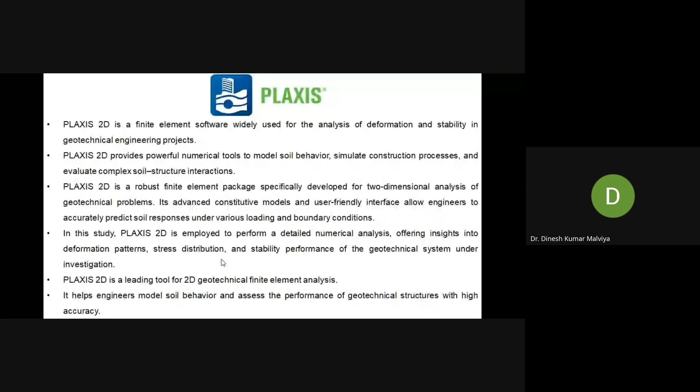With this small background of the software, today's topic will focus on some learning outcomes, in which we will try to understand the fundamentals of shallow foundation behavior under fluctuating groundwater conditions, then learn how to set up the model of shallow foundation in the 2D version of Plaxis using realistic soil constitutive models, and explore the influence of soil-raft stiffness used to represent the flexibility of the soil in terms of flexible and rigid foundation.

Also, the very important factor of groundwater fluctuation will be assessed, because with variation of groundwater, pore water pressure develops, and consequently effective stress changes, since total stress equals effective stress plus pore water pressure. So if groundwater fluctuation is there, pore water pressure fluctuation will be there, effective stress fluctuation will be there, and consequently it affects the shear strength of the particular media.

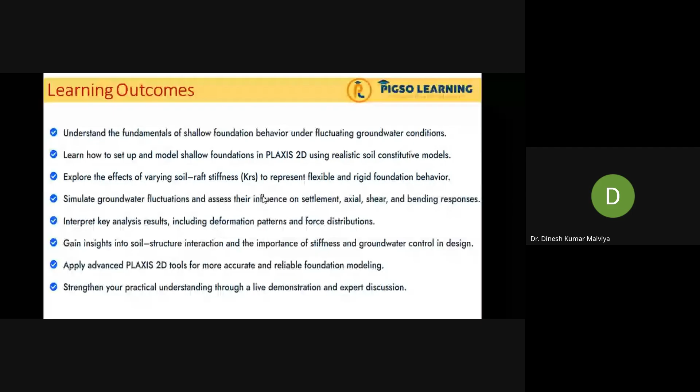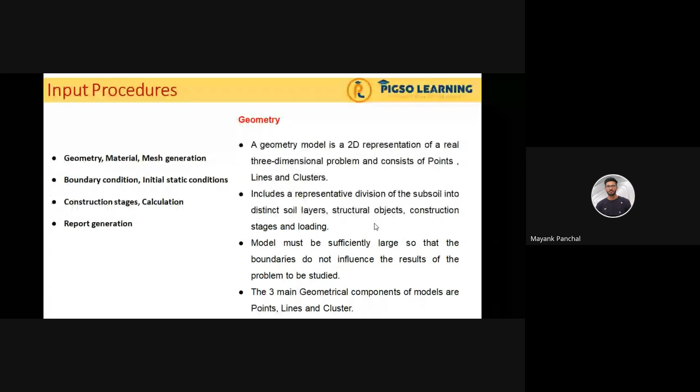We'll discuss some of the input parameters and procedures, which will include geometry, material, mesh generation, boundary conditions, initial static conditions, construction stages, calculation, as well as some report generation.

When we talk about geometry, we'll discuss representation of soil models, soil stratigraphy, and material properties related to structural elements such as pile foundation, or in our present case, raft foundation.

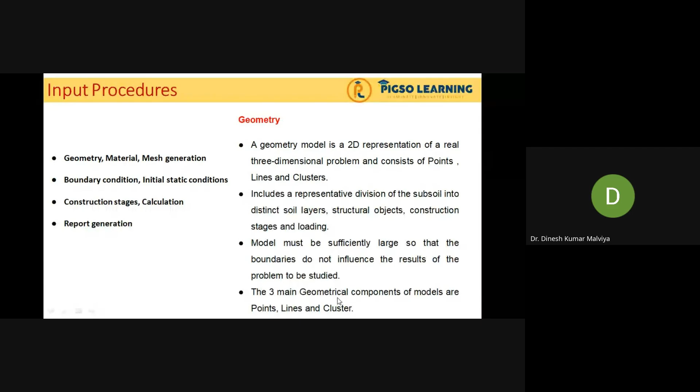This will include distinct soil layers, structural objects, construction stages, and loading. The model must be sufficiently large so that boundaries do not influence results. Boundary condition is also one of the important parameters to be taken into account, and the main geotechnical geometric components are point, line, and cluster.

When we talk about boundary conditions, the deformation problems are of two types: conditions consisting of prescribed displacement or prescribed force based. All boundaries must have one boundary condition in each direction so that it satisfies all conditions. So prescribed forces are equal to 0, and it is a free displacement.

Some fixity depends upon the fixed foundation, or maybe vertical or lateral direction of flow, and depending upon the version of the software, it shows roller support or fixed support in maybe parallel or crosshatched lines.

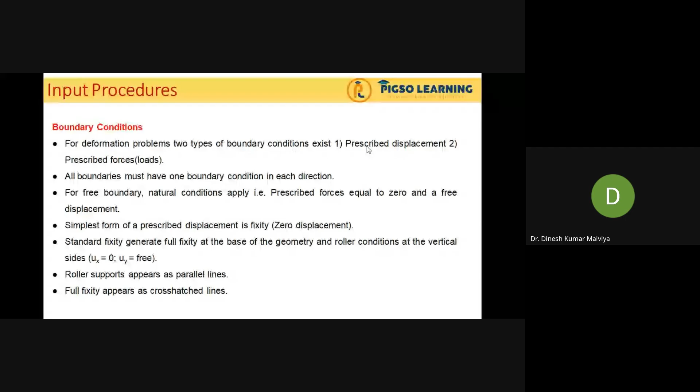Then we need to define our material properties. Material properties may include the constitutive soil models which we are using, maybe the unit weight, maybe the elasticity.

After that, we need to define the material properties of our structural elements like pile foundations, raft foundation, or tunnels, whatever we are using. We need to define all these things with adequate material strength, and while defining the material property, we should try to be as realistic as possible so that we can have results close to the field condition.

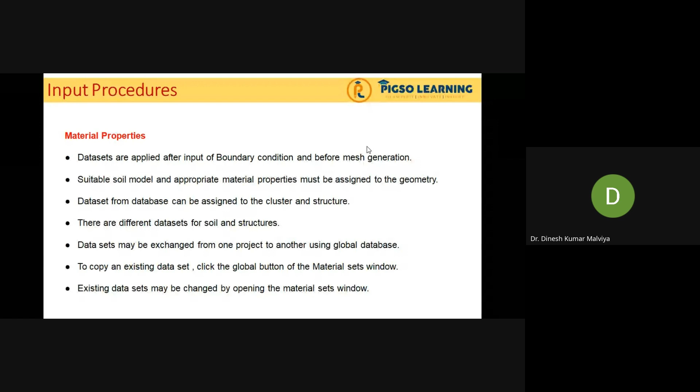After doing all this mesh generation, definition of material properties, definition of boundary conditions, and the constitutive models, once all things are cleared and checked, then we will define all the things in several construction stages.

Let's say, for example, what happens in the field. There is a soil medium, then we need to apply our foundation, we need to construct it. Over the construction of that foundation, we need to construct the buildings. So these are in stages. It is not like in a single day or a single minute it is going to happen.

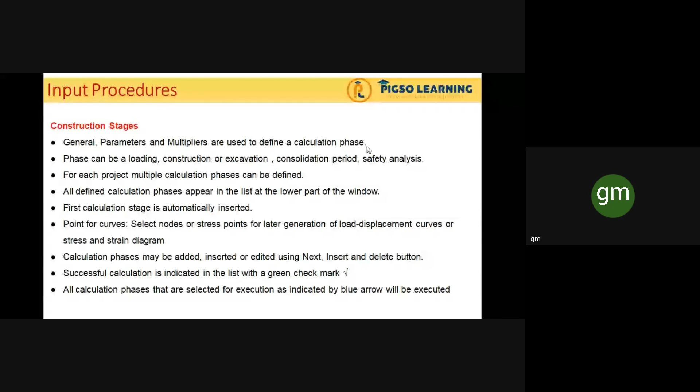So we need to define all the construction stages, and once it is done in a holistic manner, then we will try to analyze our results.

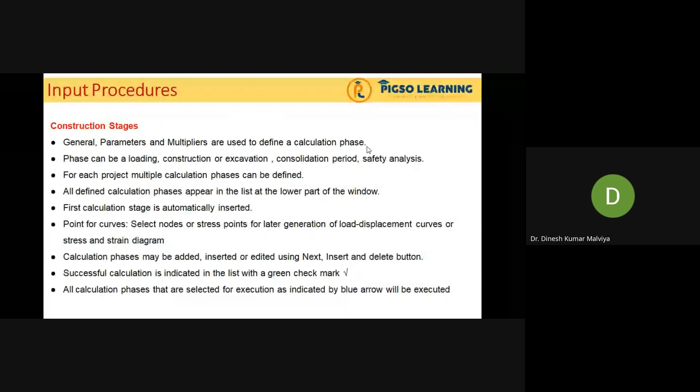So if I talk about the soil models which are available, there are several different soil models available in this Plaxis software, like linear elastic, Mohr-Coulomb, hardening soil model, jointed rock, and many more.

So we'll try to discuss this hardening soil model, which is very much popular for modeling.

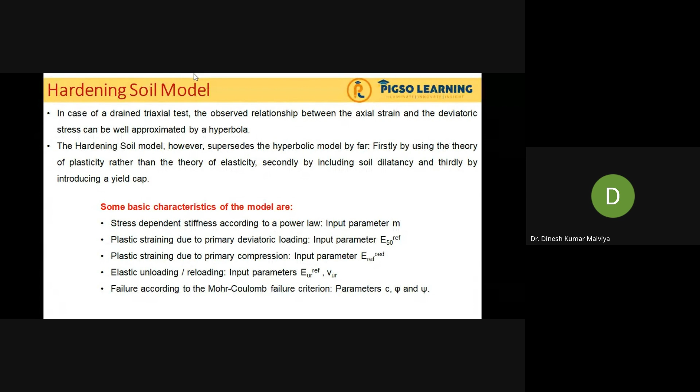So moving forward with this background knowledge of the software, we'll try to go to our problem, today's problem. For foundation, there are two types of foundation. Most of the time it is either shallow foundation or deep foundation.

If the depth is quite high, then it will be categorized into deep foundation, whereas if height or width is quite high, then it will be considered to be shallow foundation.

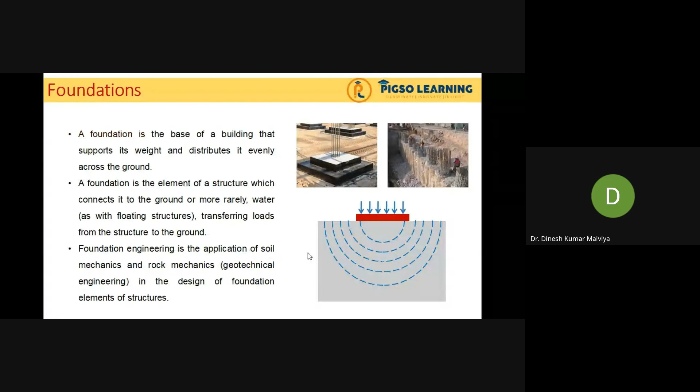The other thing we need to take care of is the stress or influence zone, shown by different lines. If some small loading is applied, say 10 kilonewton, a stress zone develops. If we increase to 20, it increases like this. This influence zone corresponds to the ultimate capacity of the foundation. You can see this line is within the soil domain, which is fine. But if the boundary conditions are not well defined, the stress zone or envelope may go outside this, showing poor consideration of boundary conditions, eventually leading to reflection of stresses, which is not desired. We should keep this in mind.

For today's problem, we are considering a heterogeneous soil layer because we are considering some soft soil material. The clay layer is on top, up to about 8 meters. With this realistic soil data, we'll now move to the software interface.

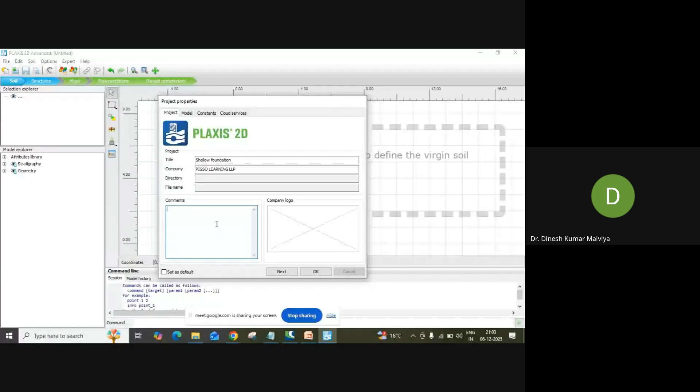First of all, you will find this kind of interface. For starting the project, we'll do it like this, and we can write the name. Let's say we write 'shallow foundation.' In comments, you may write anything for your own reference. For our case, we are writing 'ground water table considerations' - just for marking what you want to understand with this.

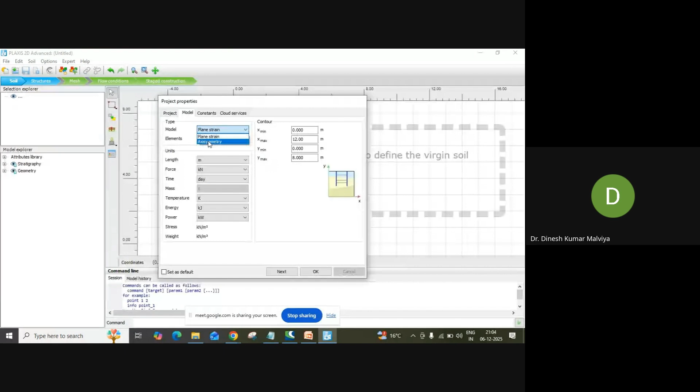After that, we'll go to model. We have two different types of models called plane strain or axisymmetry. Most of the time, if your problem has symmetric geometry or symmetric material properties, you can go with axisymmetry just to save time, because if the geometry or problem is symmetric, the responses will also be symmetric. Whereas for a plane strain problem, in which two dimensions are quite high in comparison to the third one, we use plane strain.

Mostly this is used for slope stability assessment, because in that you find the third direction is quite high. Since we are not much worried about computational time and those things, we are considering our plane strain kind of setup.

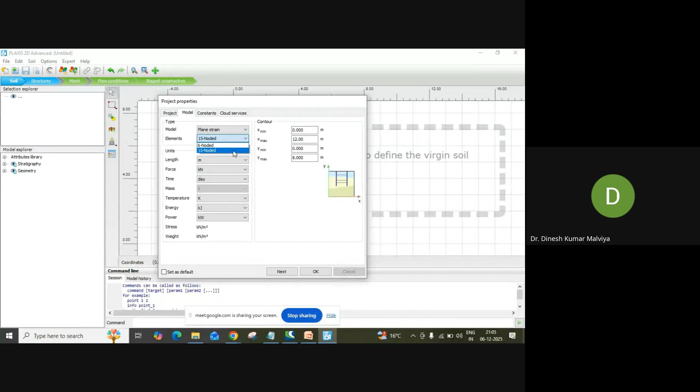Here you can define your element using 6-noded or 15-noded elements. For our case, today we will define 15 node. When considering 15-noded elements, the discretized continuum of each element will have 15 nodes, which increases your computational time. It will affect your accuracy as well.

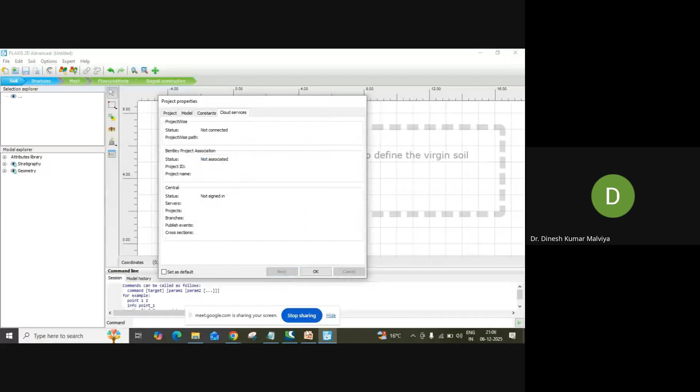After that, we'll define our model here. First of all, we need to discretize our soil - let's say 50-meter length and minus 30-meter depth. Let me check here - oh, we are having up to 50-meter, so we will take the depth up to 50-meter, because in field conditions you will have this kind of realistic soil data.

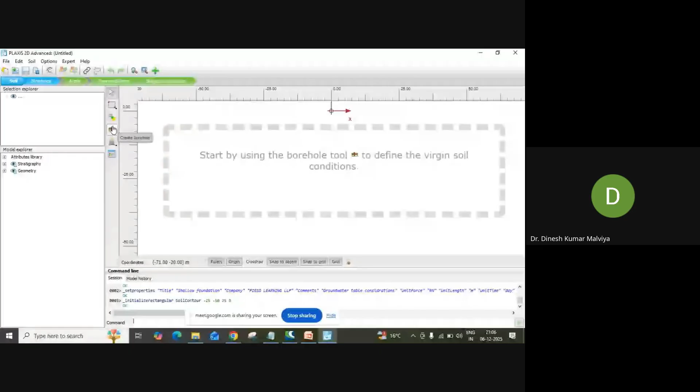Now we'll try to add the material property. The first layer is soft soil, soft clay we may say, which is modeled using Mohr Coulomb, and the drainage is selected like this. The unit weight in unsaturated condition is 15 kilonewton per meter cube, whereas for saturated condition it is about 18 kilonewton per meter cube. The elasticity is about 3400 kPa.

The depth dependency has been considered - I will tell you what that means.

After that, we will go to this, considering kx and ky, which are the coefficients of permeability in both directions, like this. So this is the property for the first layer.

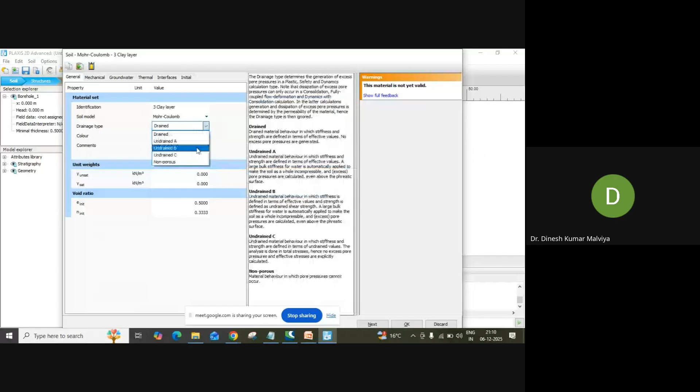Now the third layer - we'll take all the data from here.

So the last layer is of deep sand, and the unit weights are corresponding to 17 and 21 for unsaturated cases.

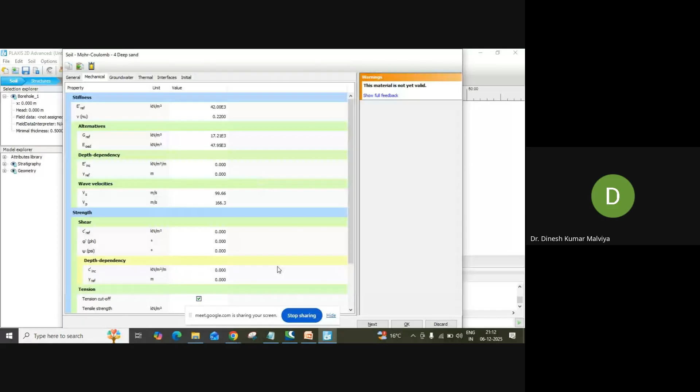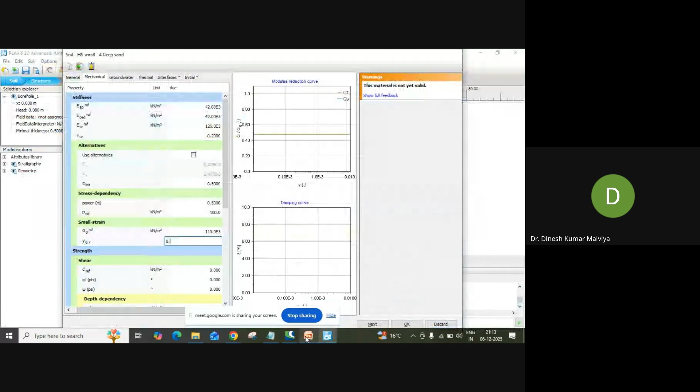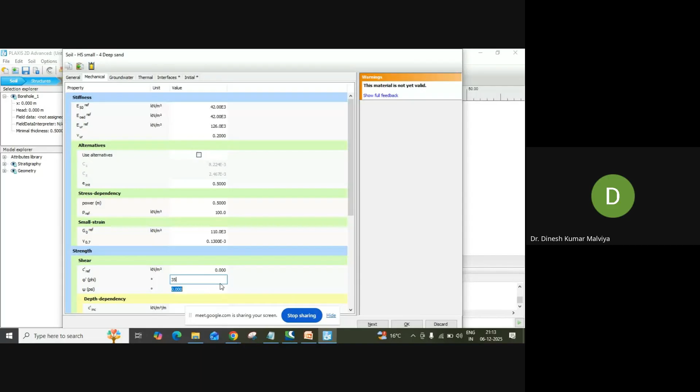We have selected, and now it is a bit more dense, so a higher angle of internal friction will be there.

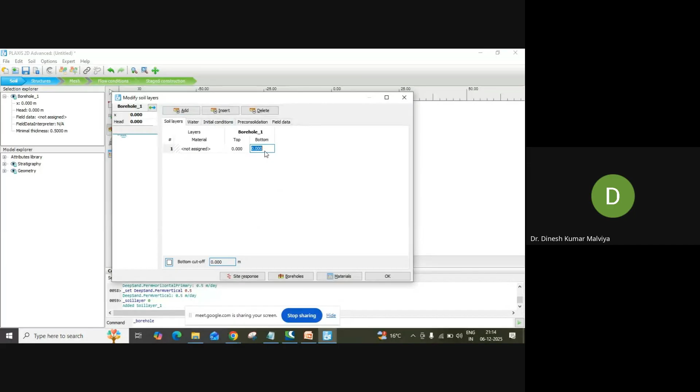Okay. Now we try to define the material properties. So the second layer is 8 to 22, third is from 22 to 35. And the other one is up to 50. Okay, perfect. So now we'll try to install or assign the material properties.

One thing I need to focus on is that the water table is at the ground level. If you want to move it, just change the head, so you can do the fluctuation in water table, which significantly influences the performance of the foundation. For our case, we are considering it somewhere here, maybe 5 meters.

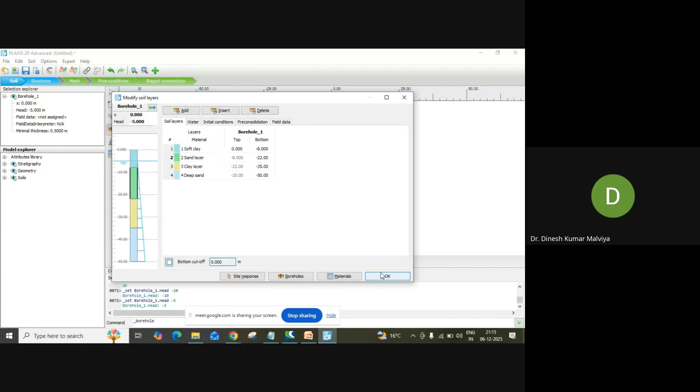So you can see this discretized soil model is here. I hope by now you have some idea how to model these soil layers. Do we have any questions?

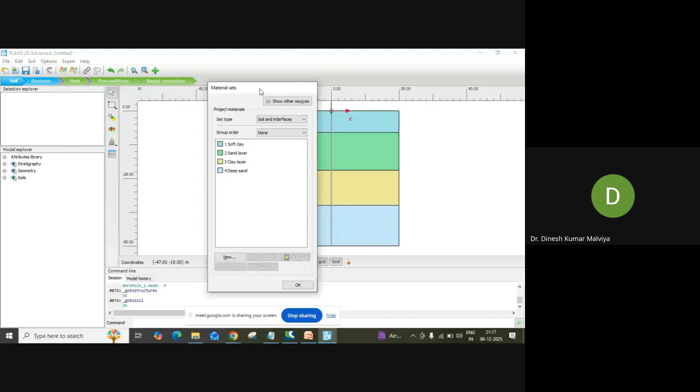After modeling your heterogeneous soil media, we need to define our foundation also. There are two approaches to define your shallow foundation, either using the volume raft or the plate element. If you are interested to model it using the volume, then you need to define the material property as well.

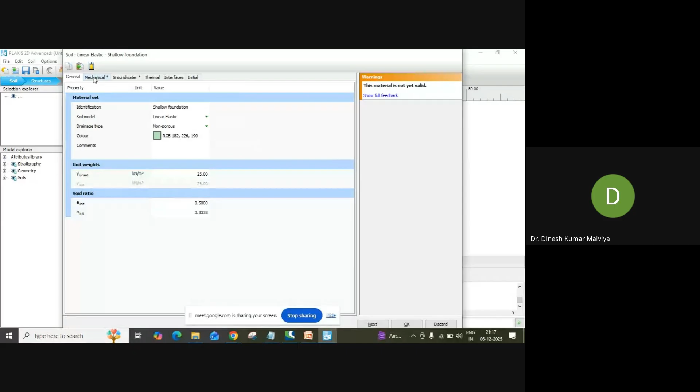So we are considering it to be M25 grade of concrete, so 25 kN per meter cube. With this, you can now model your foundation. Let me change the color a bit.

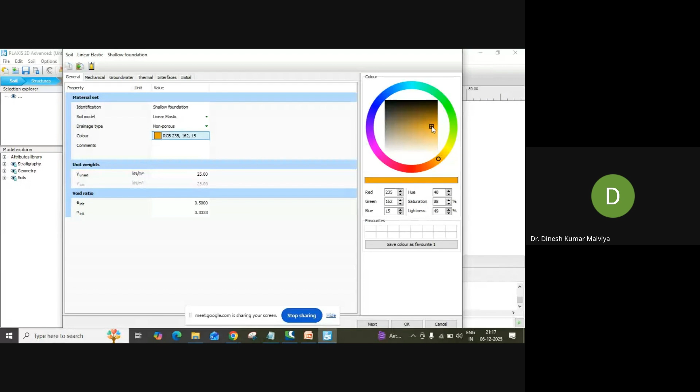Go to structure. If you are interested to model your foundation using the volume element, then you can use this soil polygon option. Otherwise, there is another option of creating this using the create plate element. For this, maybe some thickness.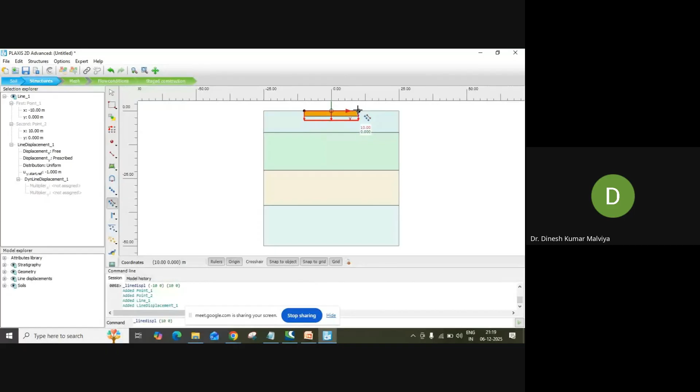Now, no material is assigned, so just assign the material shallow foundation. You can see it is here. Now you can apply certain load also, or maybe settlement also. Corresponding to settlement, you will be having certain values.

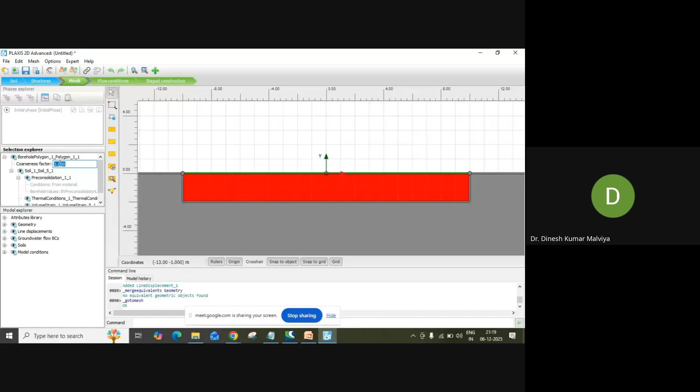Now we'll go to mesh. During meshing, you should also consider 2-3 points since it is a foundation. If you see, the coarseness factor is 1 for each and everything, but since this is a foundation, I want to have a better definition of the elements, so I will do it like this.

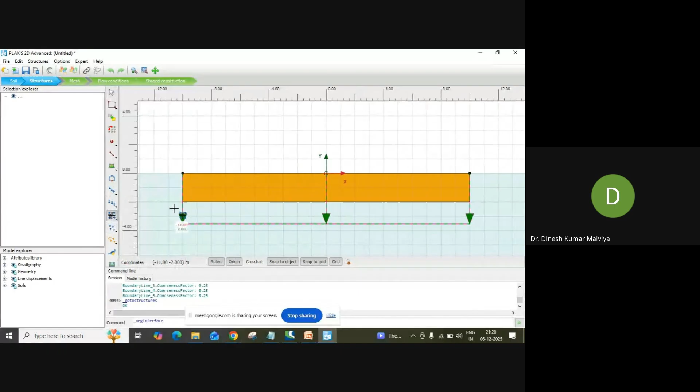Also, if you're interested in capturing the complex soil structure interaction, you can apply the create interface here. Now do some finite element mesh generation.

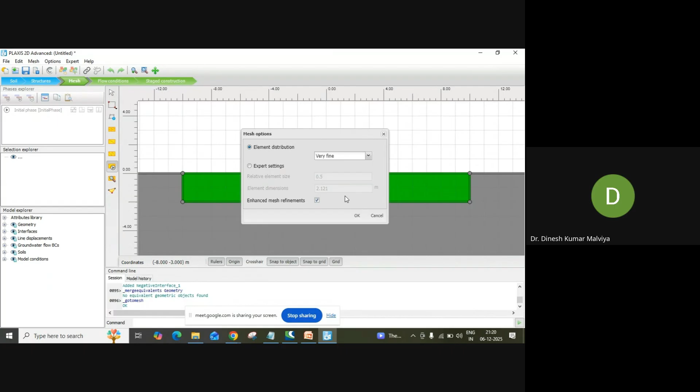Plaxis allows you to discretize your soil continuum in several different types of mesh. It will give you 5 different types of mesh. Very fine is the mesh quality in which the discretization will be of smaller level.

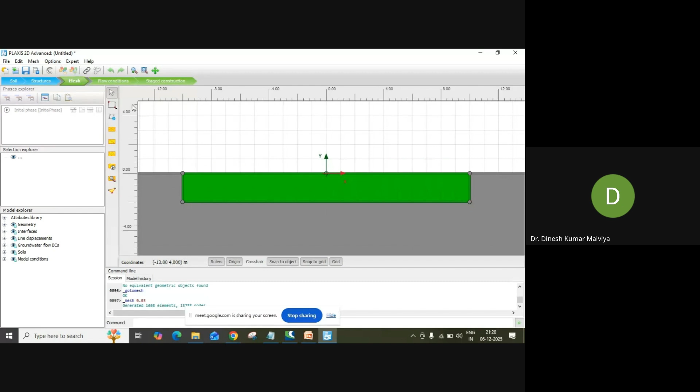Now see the water table which we have considered earlier, it is here. Now in stage construction, the first stage will be the in-situ stress generation. We are not going to do any addition of foundation or anything, but in the second stage we'll try to add our shallow foundation.

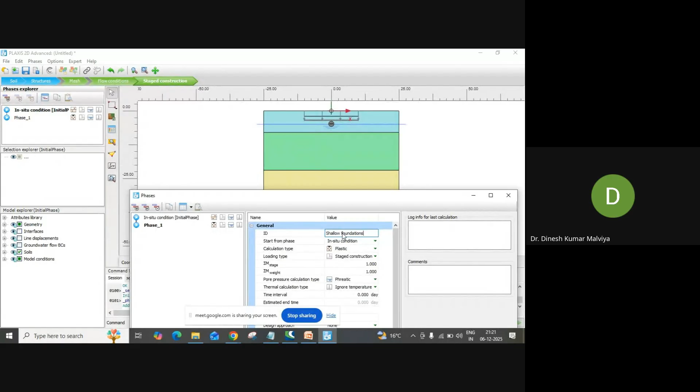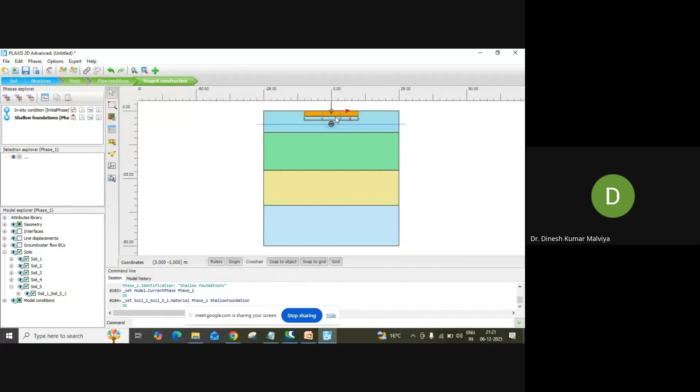So when we come from here to here, now we will activate our soil model. Just change it to shallow foundation. Now you will see this shallow foundation material property is being assigned. You can use this thing. Interface and all is being activated.

Now you can apply certain loads, maybe 20 kilonewton for the first time, then incremental order, because this load increment shows that maybe the construction is in progress or some activity is going on, accumulating the weight. Sixty, maybe.

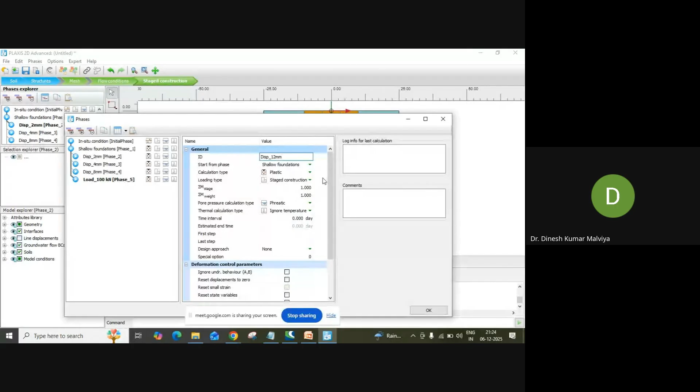Okay, so now load is there. Since we have selected the displacement option, we will apply the displacement of initially 2 mm. But there are two approaches, load based or displacement based. So first of all, we'll activate these, and minus 2E-3, so this is equivalent to 2 mm.

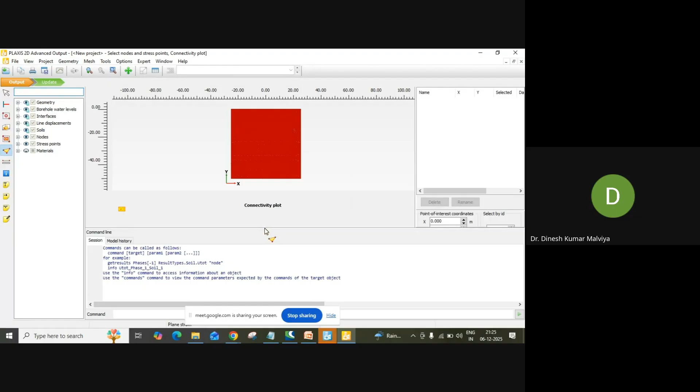Okay. After that, we'll select some point to plot our load settlement curve. You can select any point, and you can switch off the stresses and node to see this.

Let me take you to one more point which I need to address: since we have selected some coarseness around this foundation, you can see small and uniform sizes, whereas the element sizes where the coarseness factor is high are like this. So we should focus on having this kind of mesh quality around the structural elements such as foundation or tunnel which we are going to construct.

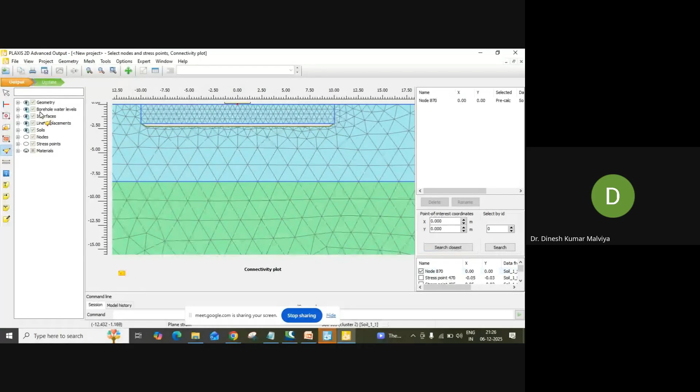Okay, let's take some point. Before starting, you need to save your file. Okay, and you will use this button to start our calculation.

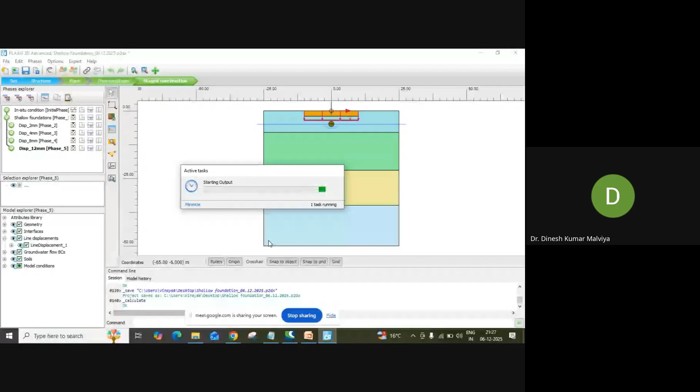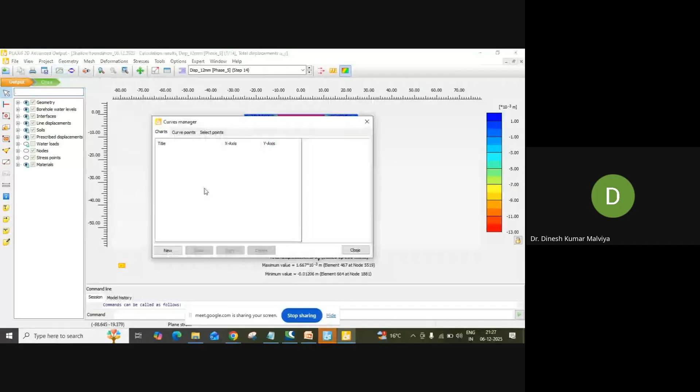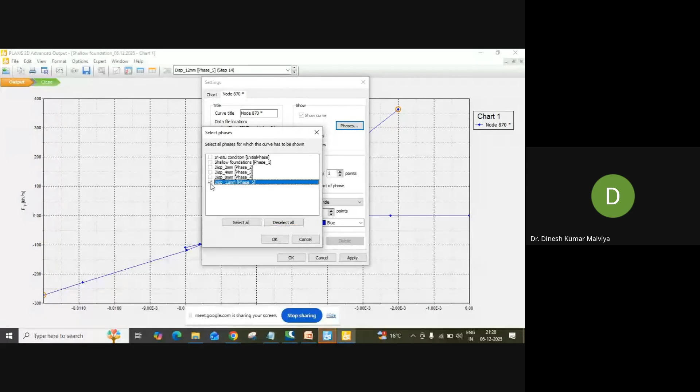Okay, so this green tick shows that this has been completed successfully. Okay, let's go to output. So you can see, this load settlement curve you can plot using this option, either in cumulative, or if you are interested plot for single, you can apply like this.

So you will find that this much load is being carried up to this point. And if you're interested, you can see all this using this. So for 12 mm settlement, it is around 272.216 kilonewton per meter load. So you can use this tabular option also for load settlement.

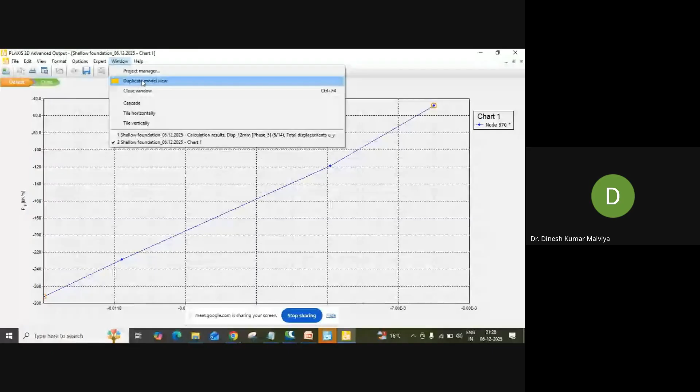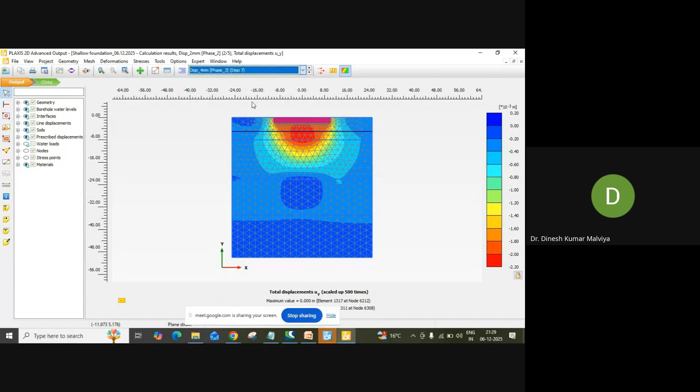And from contour also you can see, so as the stresses in terms of displacement are varying, you can see the stress profile and everything gets varied. You can check for each and every step.

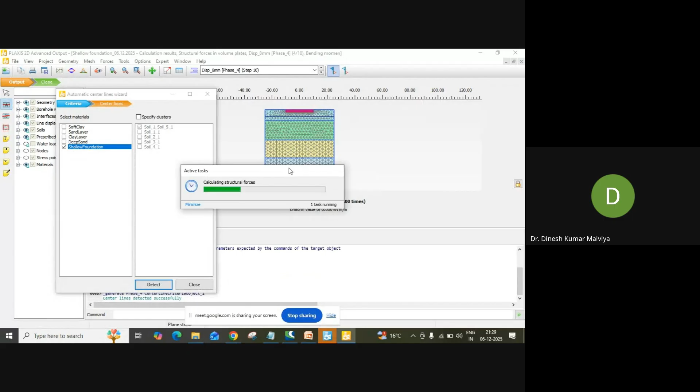Also, if you're interested in calculating the bending moment in this foundation, then use this option of structural forces in volume plates. From here, since our case is of shallow foundation, we'll try to detect which one is the shallow foundation for this problem. And let me make it larger. Yeah. So you can see it.

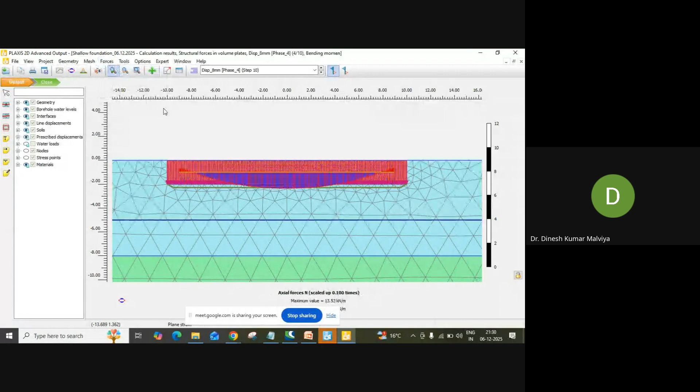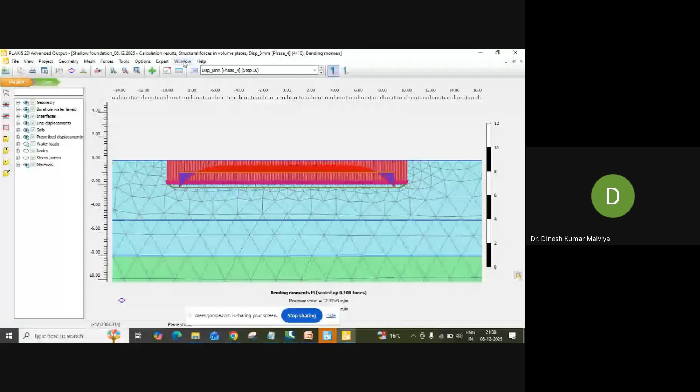If you want to find out axial forces, you can see the distribution of axial forces along this foundation, shear forces, as well as bending moment. So already we have discussed this force distribution and the load settlement curve. Even if you're interested in calculating some of the stresses, you can very well see it.

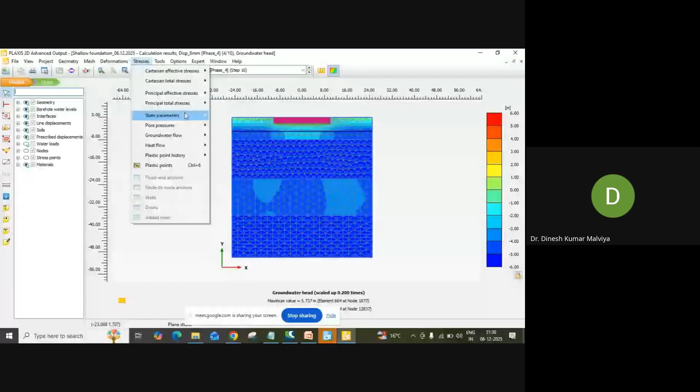Like, you can see some pore water pressure distribution. This line shows the magnitude. However, you can calculate the total principal stresses also in this form. So you will find that the stresses are quite different when compared with these places. So the stresses are quite concentrated just below this foundation.

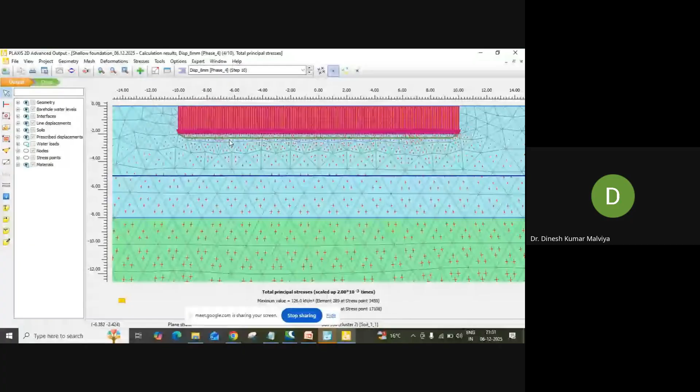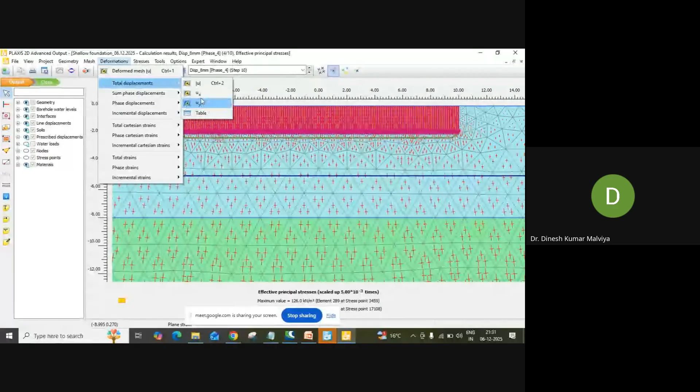Okay. So this is all I have prepared for today regarding the foundation design. The other approach is the plate element, which I'm not going to cover today, but you can model your foundation using that also. This is for monitoring your overall deformation contours. You can use this tabular form just for better record purposes maybe.

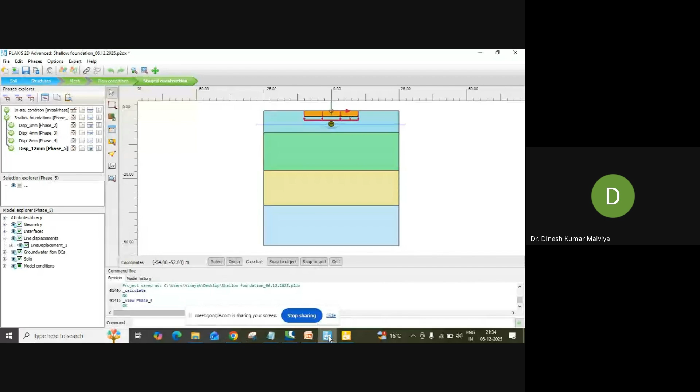Can you share the properties? Yeah, already I have shared it. You can take it from here also for your practice purpose. Also, you can get soil profile data from field-related research articles or those kinds of things. They are quite widely available. So we have seen the effective stresses also.

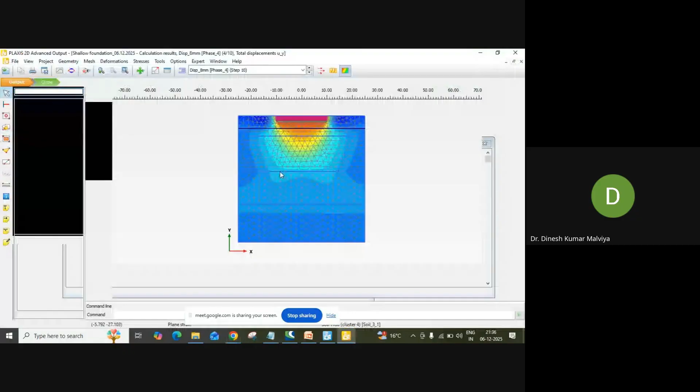Just see what you can do: we have some output files already in the Excel format. So for that overburden, you just download everything in the Excel format and subtract the previous one. What you get after the subtraction will be the original stresses for that particular case. You can do that with some exercise on the Excel operation of the results.